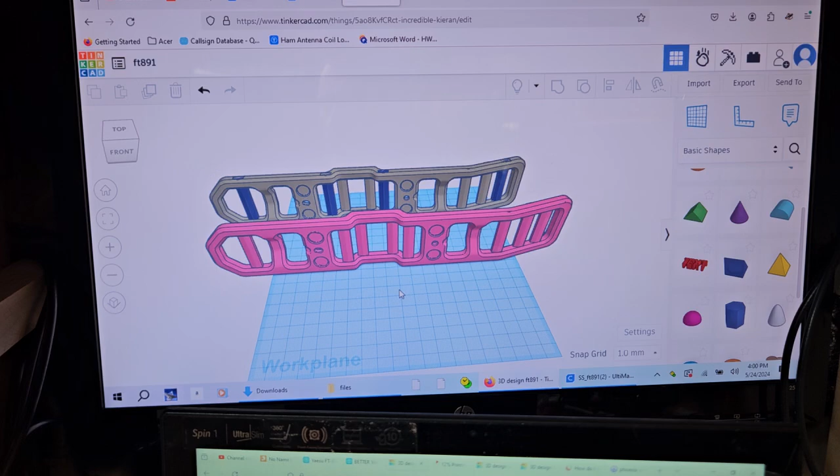This is the design I've come up with, because structurally I feel like this thing here is pretty flimsy. It's not bad, but I just don't like that there's nothing here. Something enters over here and it's going to hit whatever.

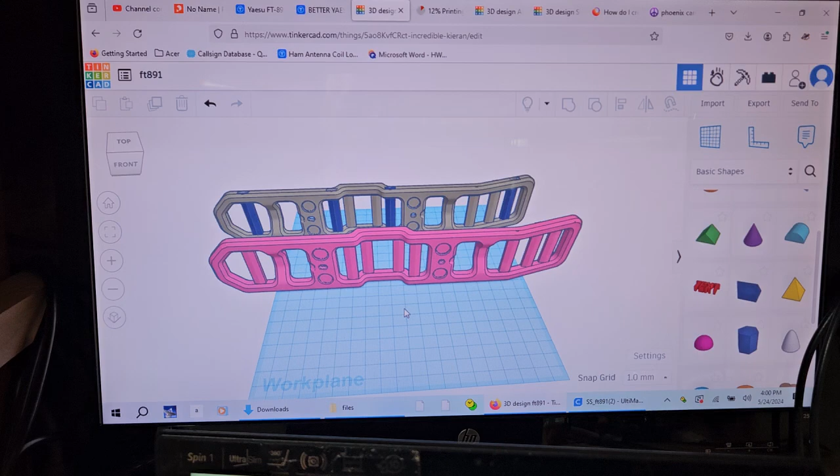There's no reason we can't print these extra pieces in here. In fact, there's no reason we couldn't just make this mostly solid right here, and wherever else it needs to be. It's just plastic, it ain't no big deal. Let's just add more to it.

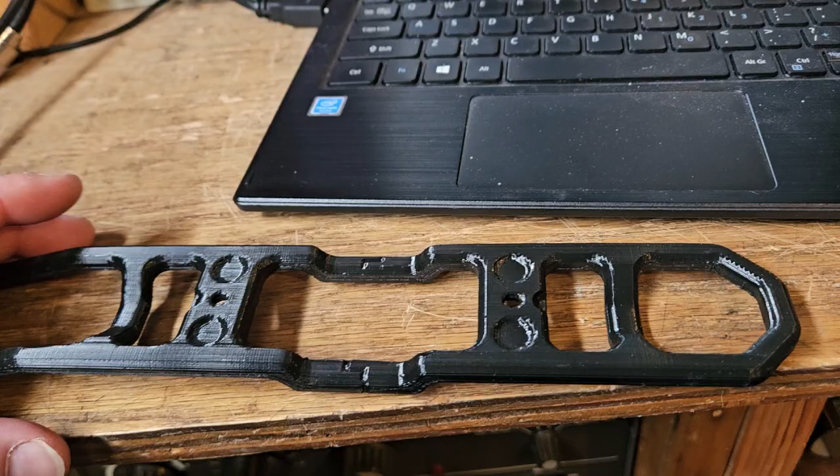What I want to do, I do not know how to manipulate the software without starting from scratch. I want this flat, I don't want this bend in here. I don't know how to do it in Tinkercad. I don't think there is a way, but if you do know, let me know.

The only reason for this little thing here is so that you can put straps here, and same with these. So these are cool features, but I would actually rather not have that there, and rather have it straight across with a piece in between. So what I might do is design another piece in between, and then it'll just be like a little notch, and you can attach things there.

What I'm trying to do is come up with a radically redesigned product to my liking that they can legally sell. Also something that just actually works better. There's nothing wrong with this design, but I want to change it.

I should probably just start from scratch because I want to change the shape on the end also.

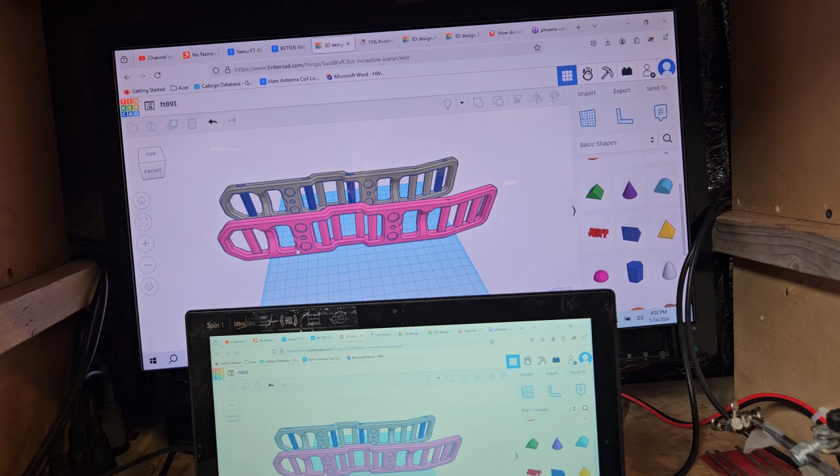There's only so much I can do in this software here without it still basically being plagiarism, more or less. This is somebody else's design, and I'm just sitting here screwing around with it. It's still basically their design. And who knows if the guy that I got it from, who got it from the other guy, is the guy that originally designed it.

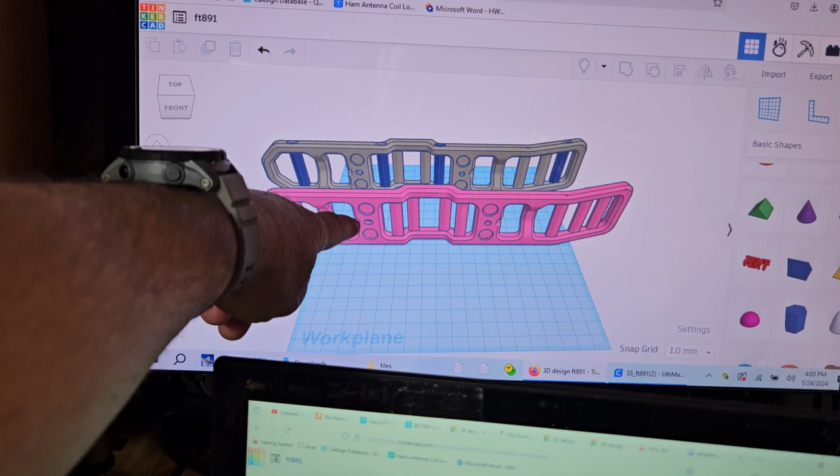Apparently originally they intended for little rubber pads to be right here. I don't know, so I'd rather these pieces here be horizontal, not vertical. I don't want to tie things across them, you know.

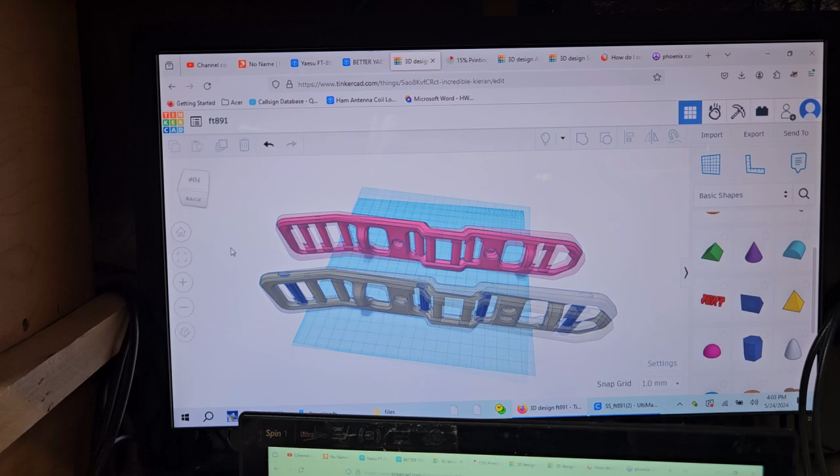My other design was I put a bar across here so you could reach in and tie off of it. So basically these ones here stick out further, so you can put a nice little piece across there and you'll be able to attach to it.